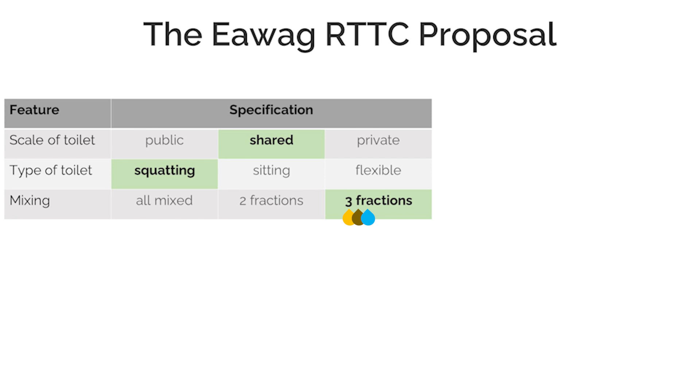We focused on developing a shared toilet, probably a squatting toilet, which would work with 3 separated streams: undiluted urine, dry feces, and 1 stream of water which would be used for hand washing, anal cleansing, and cleaning some parts of the toilets. We suggested container-based sanitation for excreta and on-site treatment for water to be recycled within the toilet. We would work mainly on the toilet and a little bit on the transport.

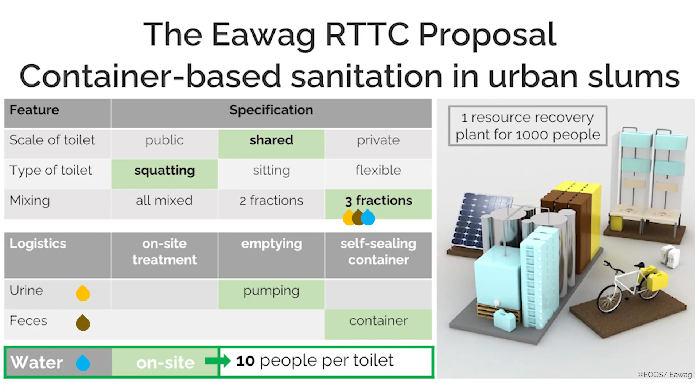Resource recovery from feces and urine at the scale of 1,000 people, as intended in this project, would need some work, but it's not really a big challenge. The Eawag engineers, including myself, therefore concentrated on developing on-site water recovery at the scale of 10 people. We were not really sure that this could be done, but we thought that we had a good chance. The reason was a new technology which had just been developed.

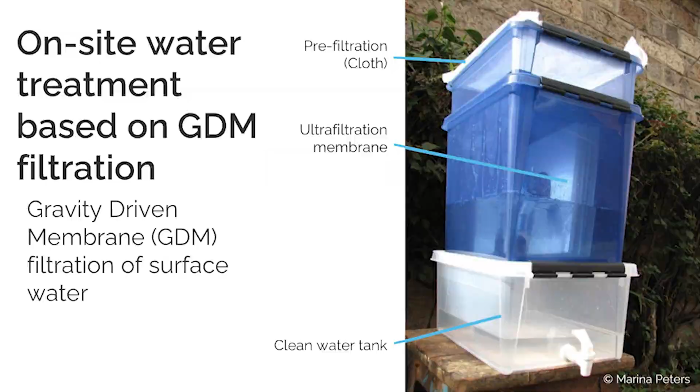Marina Peters, a PhD student at Eawag, had suggested using gravity-driven membrane filtration for the production of drinking water from surface water in poor households of the Global South. At the time, nobody really thought it would work. Marina used ultrafiltration, which is an excellent method to produce drinking water, but in large plants with high pressure, not just with gravity. And we all expected that the filter would clog. It is common knowledge that such filters need frequent backwashing, and this is difficult to do in a household.

But we were all wrong, and Marina could show that it worked. The water flow was not as fast as in a conventional setting, but it was fast enough and stable. She and colleagues could also show why. With the low pressure, plenty of small organisms would live on the biofilm, and if you ran the filter correctly, without overloading it, the membrane would always stay partially open.

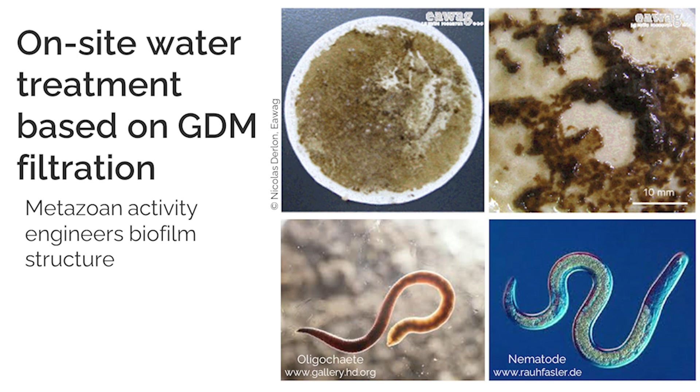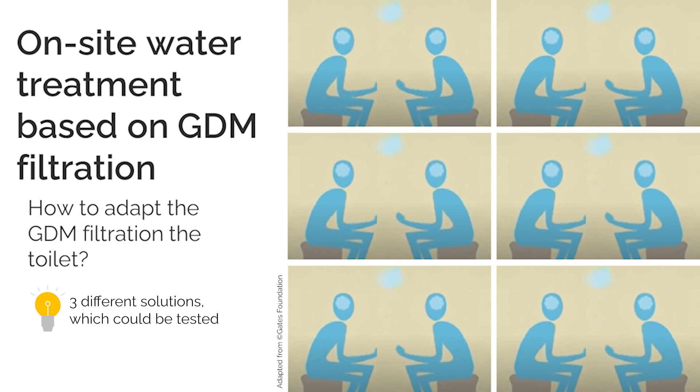To solve the problem of adapting the GDM filtration to the toilet wastewater, which would be much more polluted than surface water, we took the advice of the Gates Foundation, and we asked all our colleagues in the engineering department to help us think about this problem. They formed small groups and finally came up with 3 different technical solutions which we could test.

The main problem was the contamination with feces when the water was used for anal cleansing. For surface water treatment, we would mainly filter out algae and dirt. In the toilet, we would filter out smelly and pathogenic feces. We tested different solutions, with and without filtration and with and without aeration.

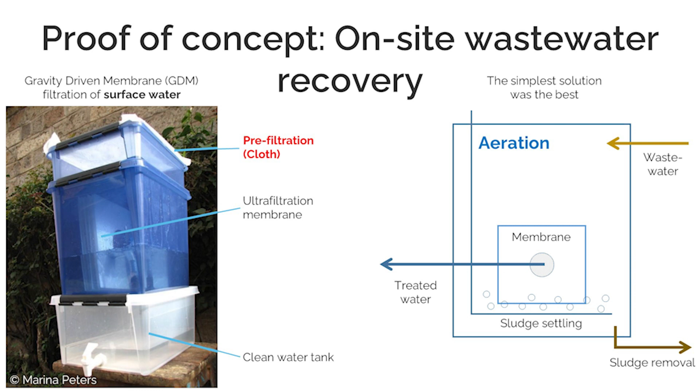We were extremely lucky. Aeration alone was by far the simplest solution, and it worked just as well as the more complex pre-filtration systems. So we ended up with a system which was very close to the model GDM filtration, just with some simple aeration and a tap for removal of well-stabilized sludge.

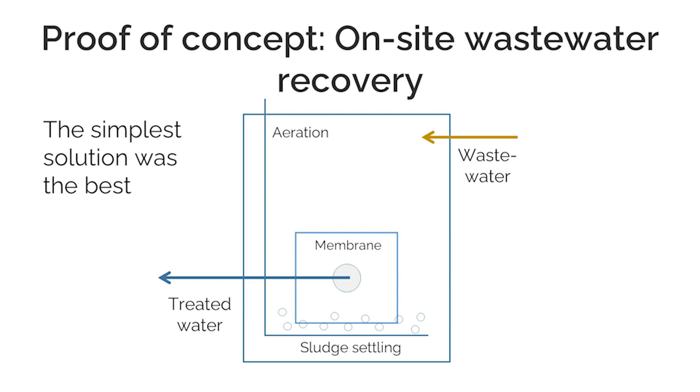We expected that we would have to remove sludge about every 2 weeks, but to our surprise, we realized that we did not have to remove sludge at all, at least not during the year we ran the treatment reactor in the lab. This made the treatment so much easier to manage in the field.

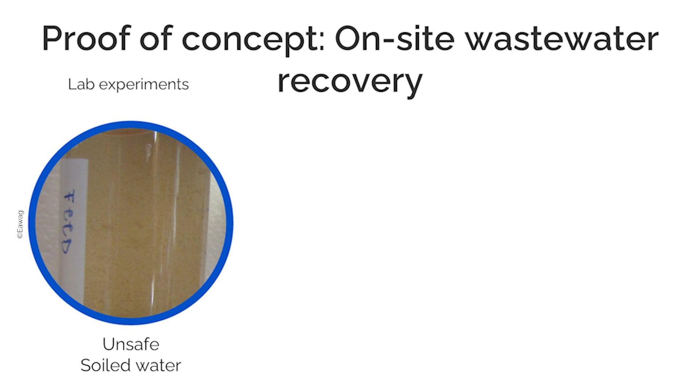In the lab, we ran the experiments with water polluted with a certain amount of feces, urine, soap, and calf blood. Remember, we collected urine and feces below the toilet, and only traces would enter the water stream. Still, the water was quite polluted because we tried to make people use as little water as possible.

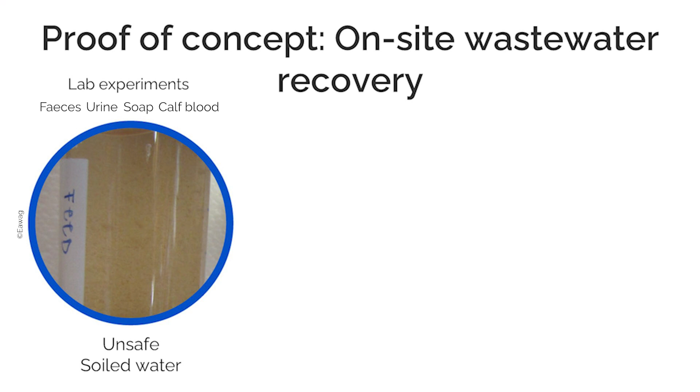The water was treated biologically and with ultrafiltration in the same reactor. This is a principle of a membrane bioreactor, or an MBR, which you may know from conventional wastewater treatment. After this treatment, most of the pathogens had been removed, but the water was still not quite clear, and pathogens could regrow.

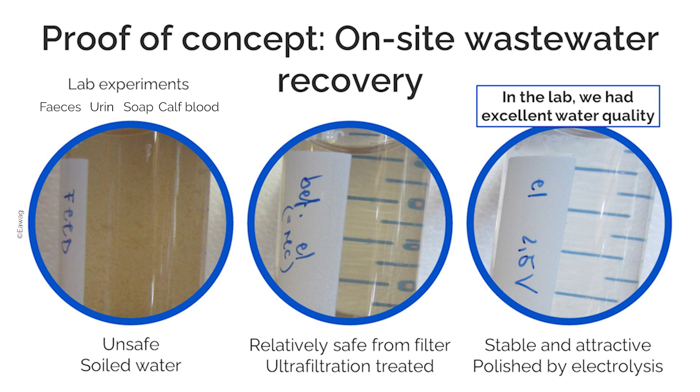We decided to polish with electrolysis, producing chlorine from chloride provided by traces of urine entering the washwater. This resulted in nice and clear water with some residual chlorine to keep it safe. We could also have used chlorine directly.

While the engineers were working on the on-site water treatment, our non-engineering colleagues in the team worked on setting up a co-creation workshop in Kampala, the capital of Uganda. The designers constructed a mock-up of the toilet, and the experts on sanitation in the Global South set up a co-creation event in collaboration with our local contacts, who in the meantime had become part of the project team.

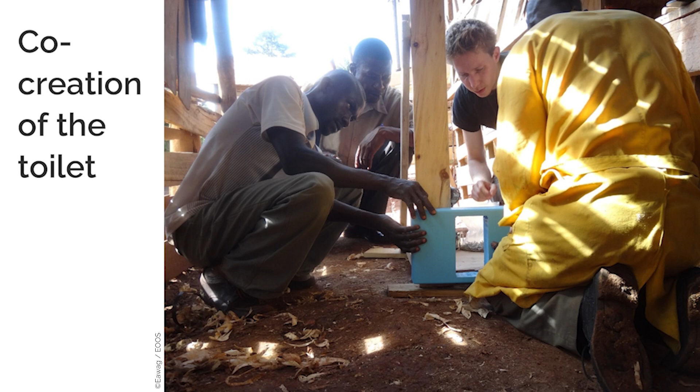The mock-up was assembled together with local craftsmen to get an idea of the tools and skills available. In a workshop, we presented the basic idea of the water recovery. We discussed with the participants whether they would be willing to reuse the treated water after it had been used, not only for hand washing, but also for anal cleansing.

This is a difficult question to answer before you are really in the situation, but we had the feeling that people would believe in the treatment technology if we made it work nicely. A vote on the type of toilet convinced the designers that people really wanted a squatting toilet if they had to share it with their neighbors.

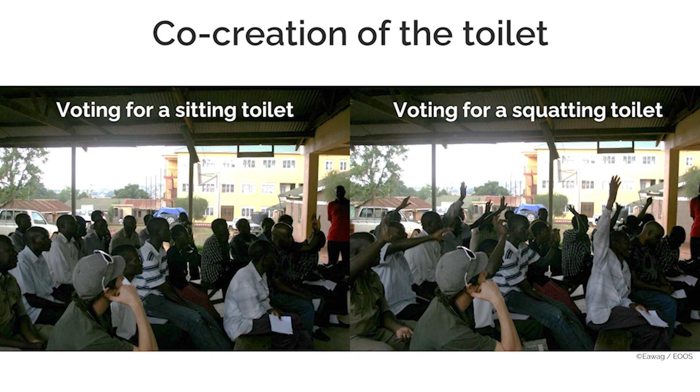We walked around in the slum and talked to people, trying to figure out what they would want. And of course, we, and especially the designers, learned a lot about the local conditions. We also discussed the logistic concept, following a methodology which at that time was in development at Eawag.

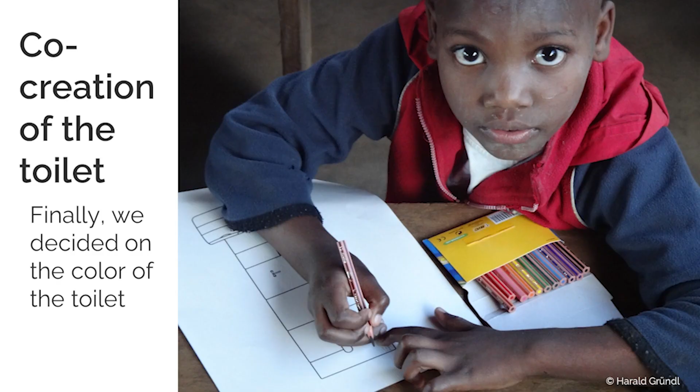Finally, we decided on the color of the blue toilet. It had to be the right blue color. The one originally chosen proved to be the color of a political party. We came back from Kampala, inspired and motivated to finalize our blue toilet.

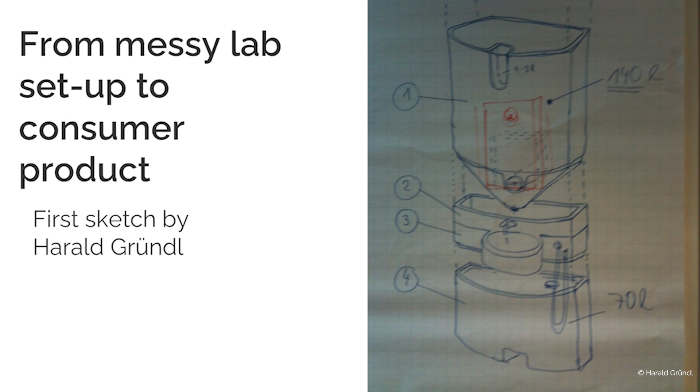Now began the integration of the water treatment in the wall of the toilet. Based on our preliminary lab results, we used Monte Carlo simulation to figure out how big the treatment reactor and the clean water tank should be. Harald used this information for his design.

There were plenty other details to deal with, like the placement and the number of membranes, which we had to buy off the shelf in sizes which were available. It looks simple when it has been done, but normally engineers prefer to optimize the technology in the lab before they involve the designers. In this case, we worked hand in hand, and this saved us a lot of time.

This was time which we desperately needed in order to ship the final product to Seattle for the fair in August 2012. We managed, and we were proud of showing our product to the Gates Foundation and to the visitors of the fair. Bill Gates was, of course, the main guest of honor at this event.

We did not have the time to make our model really work, but it was enough for proof of concept. There were many technical details, like the button that one should step on in order to open the lid, here demonstrated by the head of the Gates team, Dr. Doulaye Koné. I don't want to discuss all the technical details. Many of them proved unpractical in the field.

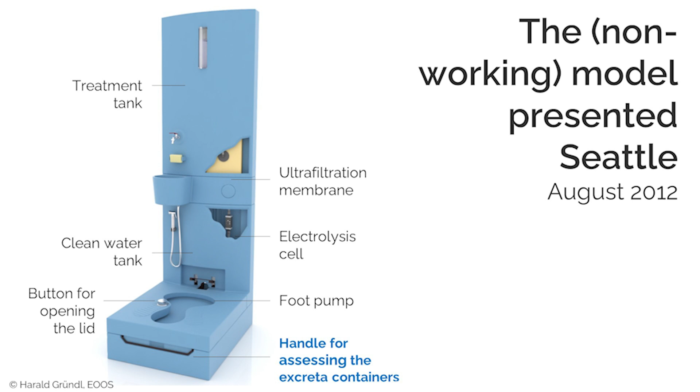But let's see what happens when we pull the handle for accessing the excreta containers. When you pull this handle, the feces container self-seals, and you can open the toilet and remove the container without looking at the feces and with minimal hygienic risks. If you unscrew the yellow cap, you can pump out urine.

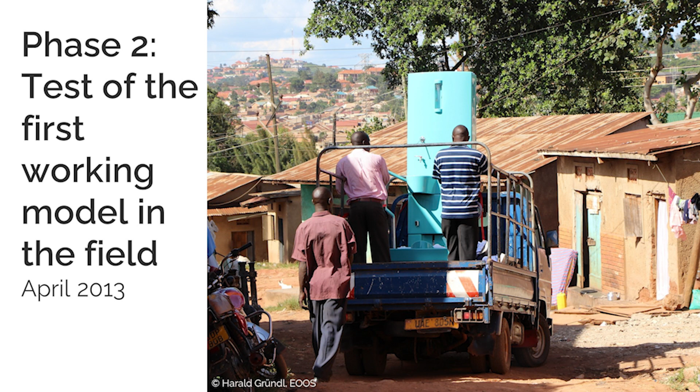At the Seattle Fair, we got a prize for the nicest toilet and funding for phase 2, where we could build a first working model and test it in the field. We again went to Kampala, this time with a functioning toilet, which we tested at the Makerere University and in a slum area. We found many flaws of the toilet, but people were generally positive towards it.

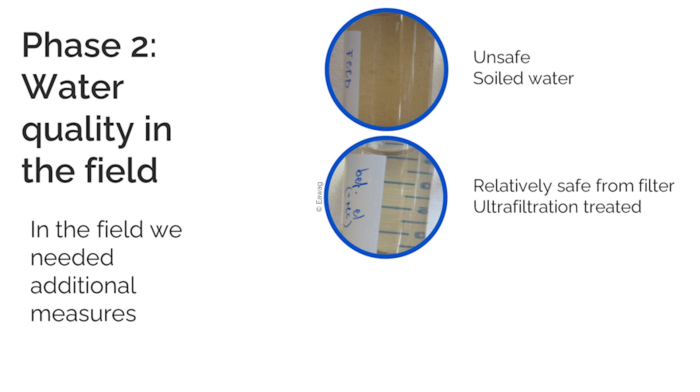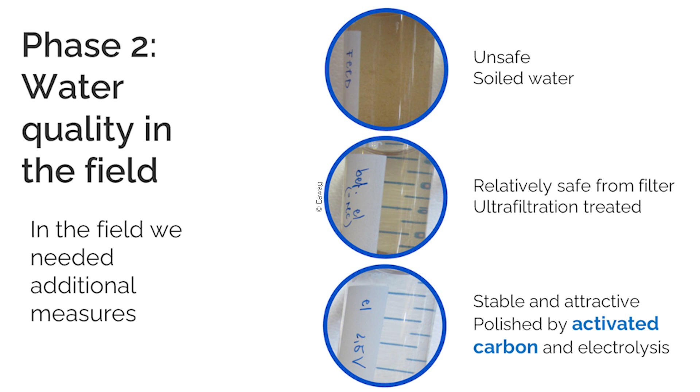A main flaw was the water quality, which was not as good as we had seen in the lab. We probably had more feces in the water than we expected. We could solve this problem with additional polishing of the water with activated carbon. After a few trials with a column that clogged, we realized that just pouring granulated activated carbon into the clean water tank worked perfectly.

We changed nearly everything else too. Replaced the foot pump with small electrical pumps because people thought that children and old people would not be able to use the foot pump. We made the toilet smaller and reversed the position of the treatment reactor and the clean water tank. Generally, this revised toilet was less fancy, but much more robust in the field.

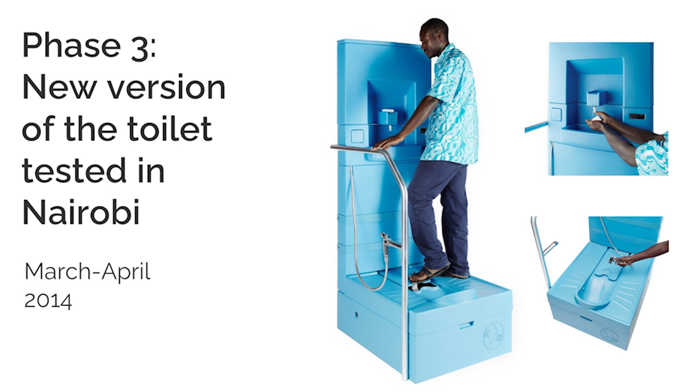In 2014, we tested it in a large urban slum in Nairobi, this time with fewer problems. People really liked the toilet, especially that they had water available for hand washing and personal hygiene, and this time the water quality was good. They also liked the flush, although only the front part could be flushed. One problem remained. We invented a valve beneath the front part in order to be able to separate water and urine. This was a weakness because the otherwise robust valve was clogged with mud when it was raining.

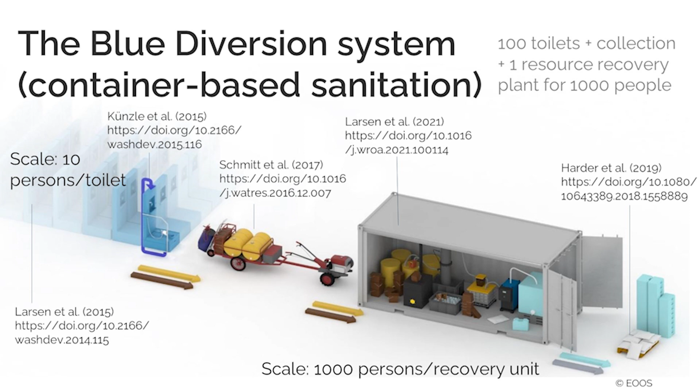We believed in a container-based solution, which we had developed, and we argued that at this scale, one could rapidly get something on the ground. We showed that transport would be feasible and cheap in the densely populated slums, and that treatment and resource recovery at the scale of 1,000 persons could be rapidly developed. The Gates Foundation did not believe us. So colleagues from Eawag took over to develop the toilet further towards full on-site treatment of excreta.

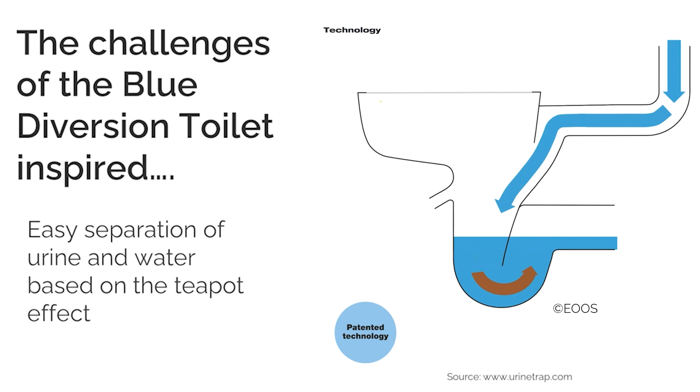Our designer Harald Gründl stayed in the project, got his own grant, and used the opportunity to solve the problem of separating urine and water without a valve in urine separating toilets. He developed the urine trap based on the so-called teapot effect. When you pour a cup of tea or a glass of red wine, and you don't pour with enough energy, you will end with tea or red wine on the tablecloth.

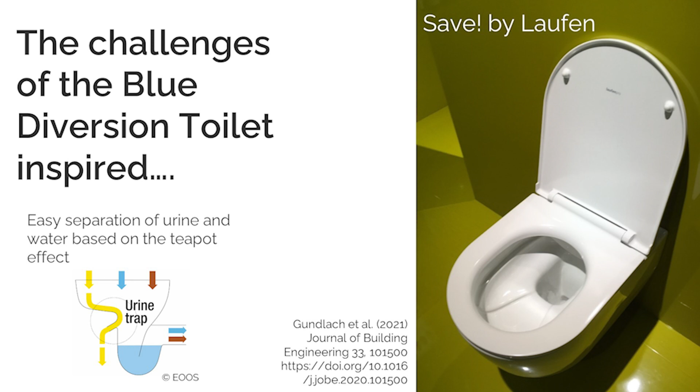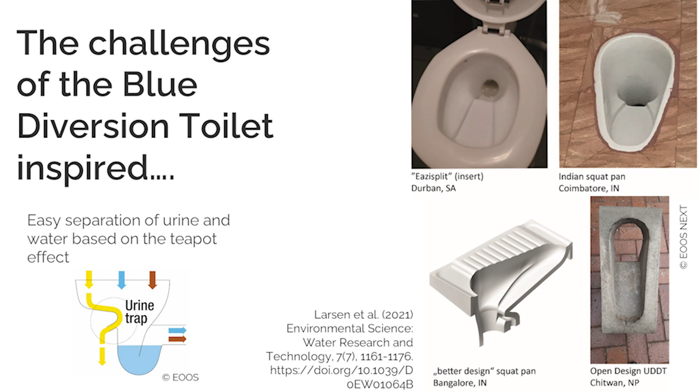This effect has now been integrated in a urine-separating flush toilet produced and available on the market from the Swiss company Laufen. At present, Harald Gründl is working with different organizations to develop low-cost, dry and pour flush urine-separating toilets to use in low-income countries, while we are waiting for the dream of Bill Gates to come true.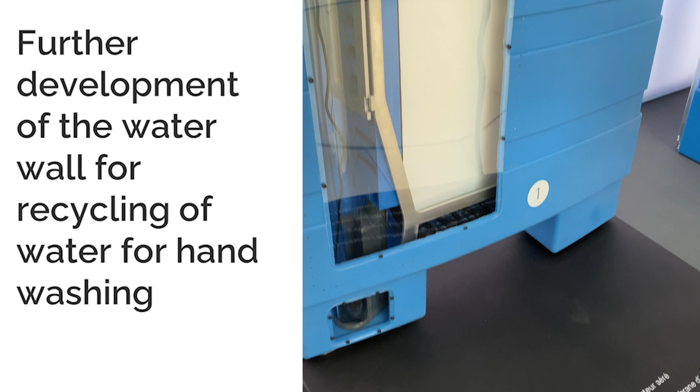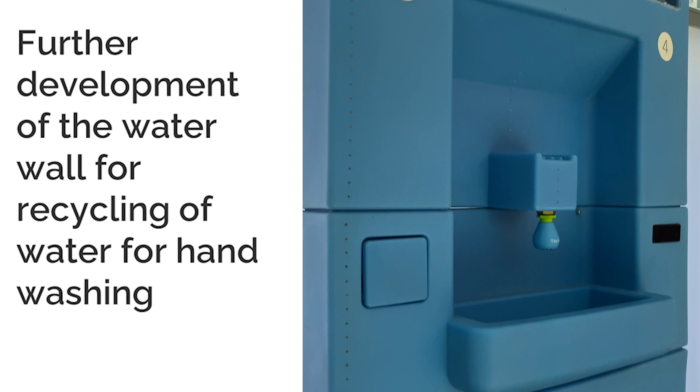Another result of the project is a water wall, which is in the process of being further developed by a company for hand washing in schools and similar institutions in the global south. Perhaps this technology could also be useful in the Arctic. You will find information on the different reinvented toilets on YouTube. I have heard that they will soon be presented to an expert panel, but this is all I know. It remains exciting to see whether at some time in the future we will have one of those magic toilets available on the market.